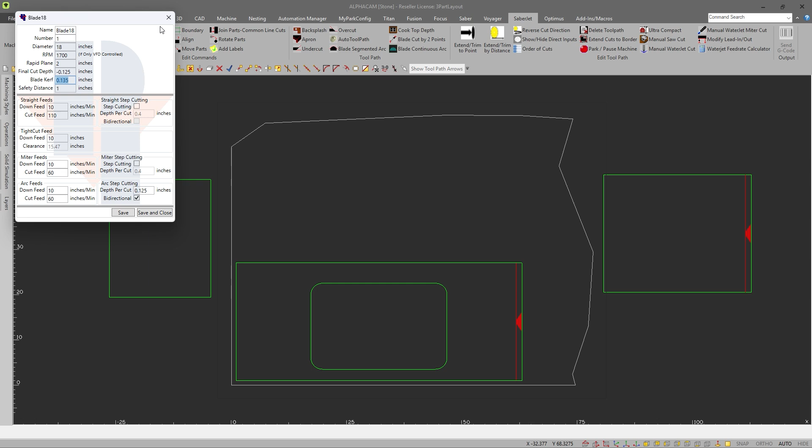Setting an accurate blade kerf in AlphaCam is important on our CNC saw and saw jets. This value will ultimately affect the overall size of our parts and also will affect the transition between the saw blade and another tool, such as a jet or router bit. To demonstrate this, I've made two different blade examples. One blade is 1 inch thick and the other blade is 1/8 inch thick.

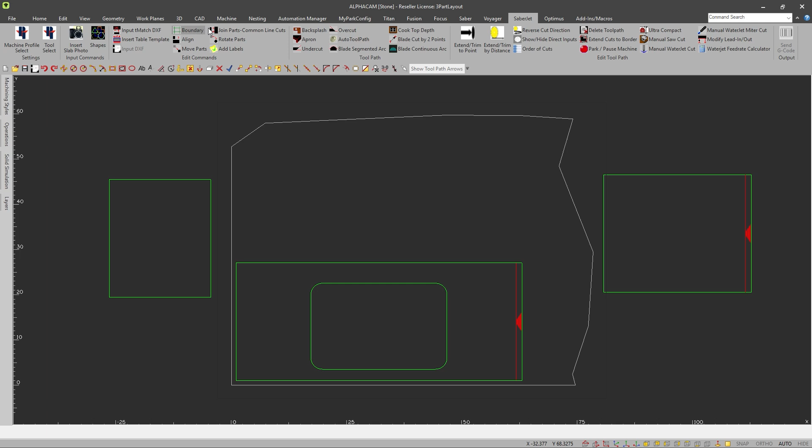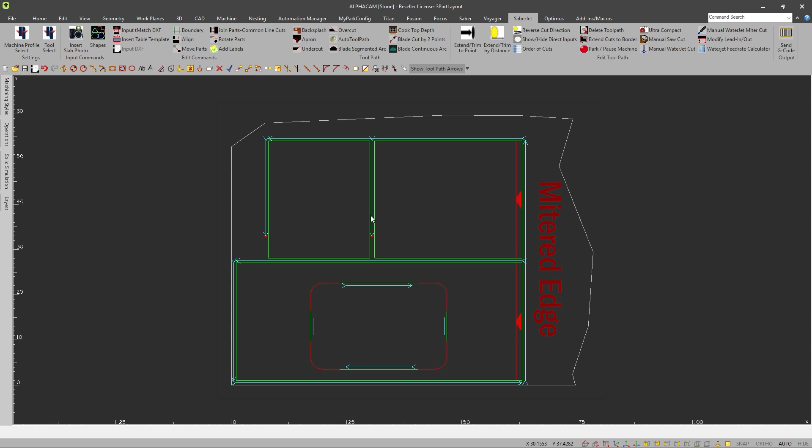For the first example, I'm going to choose the 1 inch thick blade as active when I create my first program. And we can first see this value being used when we choose Join Parts Common Line Cuts and have the blade kerf selected as the join selection. So my parts will have a 1 inch spacing when I align and join them. And when we choose to toolpath the parts, we'll see that the center of the saw blade is perfectly between the two parts, or 1/2 inch away from each edge.

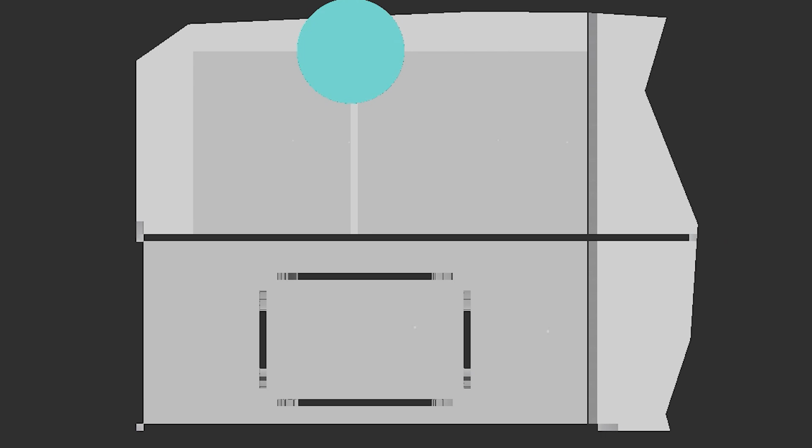And if we ran this program at the machine with a 1 inch thick blade, the parts would come out to the correct size. And we can see the edge of the 1 inch thick blade is cutting exactly to the edge of the part, and also it's cutting exactly down the center line where we've used the center line cut. We'll also see that the secondary tool, in this case the water jet, aligns with the edge of the saw blade cut as well. So we can see a smooth transition between the saw blade and the water jet on our parts.

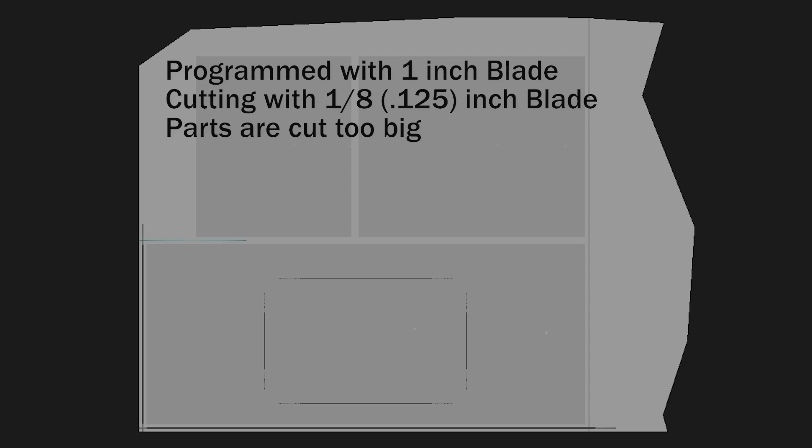In this next simulation example, we'll run the same program that used the 1 inch kerf blade, but we'll put a 1/8 inch kerf blade on at the machine. And we'll see that the edge of the blade does not go right up against the edge of the part this time. This is because we are following the 1 inch thick blade path with a 1/8 inch blade, so our parts will come out oversized. And when we cut with the second tool, in this case the water jet, we'll see the very bad transition between the two tools. The parts aren't even completely separated in this exaggerated example.

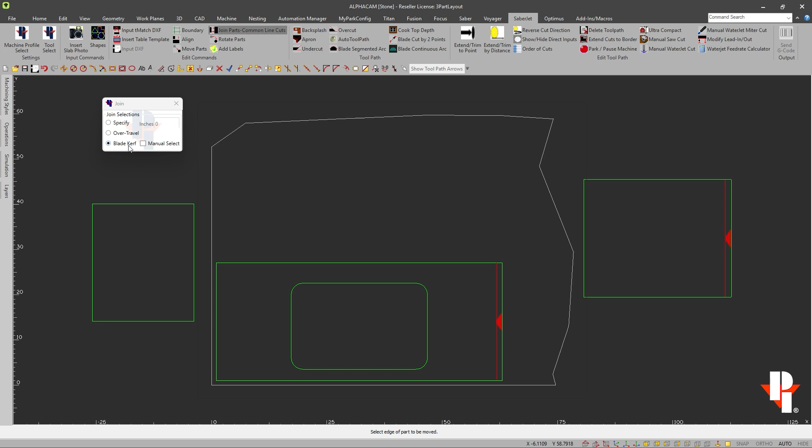Now we'll do the opposite. In AlphaCam, we'll select a 1/8 inch blade, which we'll then use to create the program. And if we have a 1/8 inch blade at the machine, we'll see that again, our parts will be cut to the correct size, and our blade transitions will be very minimal.

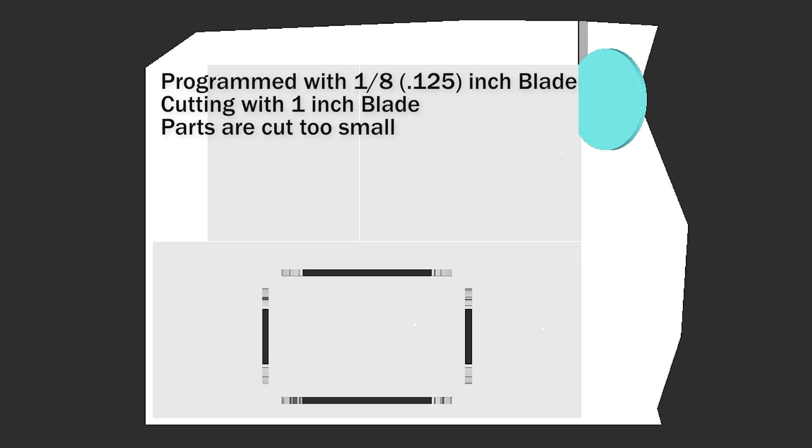And if we use this 1/8 inch blade program while running a 1 inch thick blade at the machine, our parts will be cut much smaller. As we can see, the edge of the blade cuts into the part. And we'll also see that our second tool, the water jet, does not align with the edge of the saw blade.

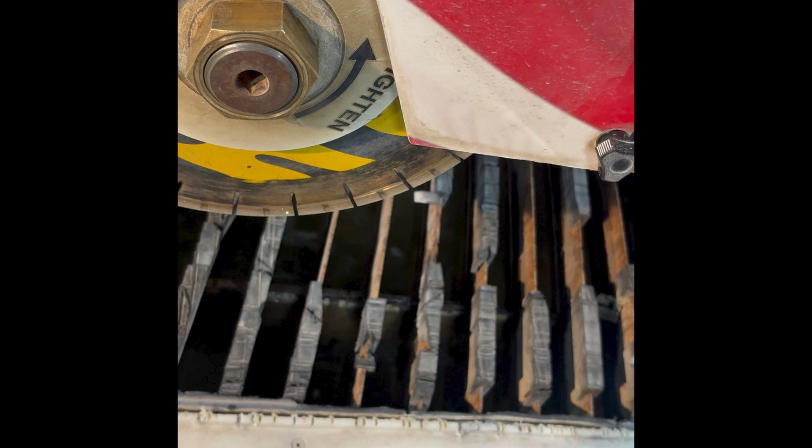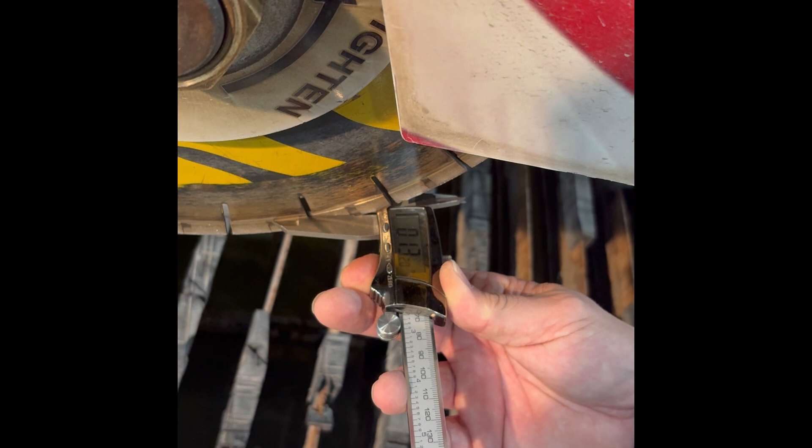Next, we'll show how to properly measure a blade kerf. We find that many of our customers measure the blade with calipers. This is a great starting point, but does not measure the needed width of the cut. This can be accomplished by using the back side of the caliper. Place the tip of the caliper into the saw blade slot. Ensure that it isn't rotated to the left or the right, but remains perpendicular to the saw blade cut. Also, ensure that it's not tilted up or down, but the caliper remains parallel to the surface of the stone. And this value is the correct value to use for our saw blade kerf.